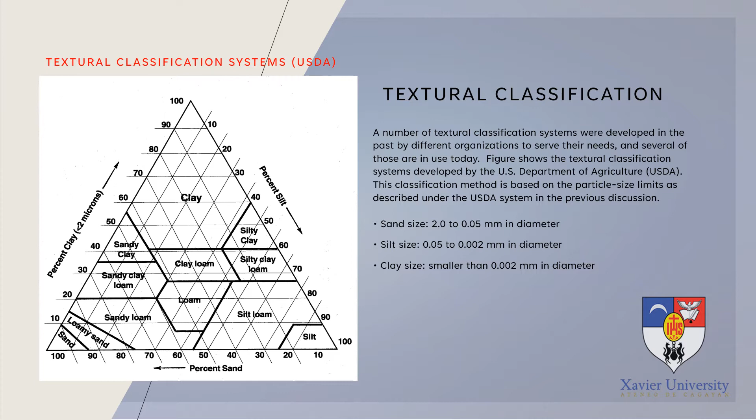So we can see here the percentage for clay, the percentage of silt, and the percentage of sand. All you have to do is pick from this. For example, we will have this problem. According to the given, we have sample A, which consists of 30% sand, 40% silt, and 30% clay size particles. So in the USDA texture classification, first we have to project the percent sand in this figure.

So we have here the percent sand, which is 30. So we have here the 30. And then we project this diagonal line from the 30 percent sand. We just follow it like that. Next, we project the percent silt, which is equal to 40. So it's here; we circle it. And the same thing we did for the sand, we project that line corresponding to this percentage.

The same is true with the percent clay. Percent clay according to the given is 30%. So if we project the line that corresponds to the 30% clay, that is what we will have. Then we identify the intersection of all three lines. And there are subdivisions here. If your point of intersection falls here, it is sandy clay; here, sandy clay loam; here, sandy loam; here, sand, silt, silty loam.

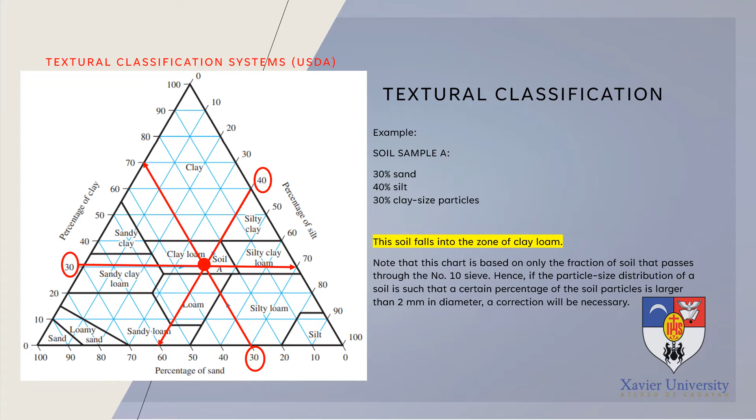We have here another example, soil B, with 20% gravel, 10% sand, 30% silt, and 40% clay. First we have to make a correction or modification. How do we do that? First, for the sand size, we have the percent composition times 100 over 100 minus the percent gravel. As you can see, for the three particle sizes, sand, silt, and clay, this is constant: 100 minus 20 is the denominator for each.

So the formula here is actually 100 minus the percent fraction for gravel, and then the same here, 30% times 100 for the silt, and the 40% for clay, which is given, times 100. So all you have to do is compute for that and then proceed with the same procedure that we did in soil sample A. So we just have to project, since it's 12.5, it's not exact, so maybe it is somewhere here. So we'll project a line there.

And then for the silt size, it is 37.5. It's not exact because it's somewhere between 30 and 40, so we just project somewhere there. And then as for the clay size, it is 50 luckily, so it's exact. So at least it's right here on its calibration. So for 50 clay percentage, we have to project that. And then the point of intersection belongs to the division of clay. We can see it easily. So, meaning, we can classify our soil as a clay.

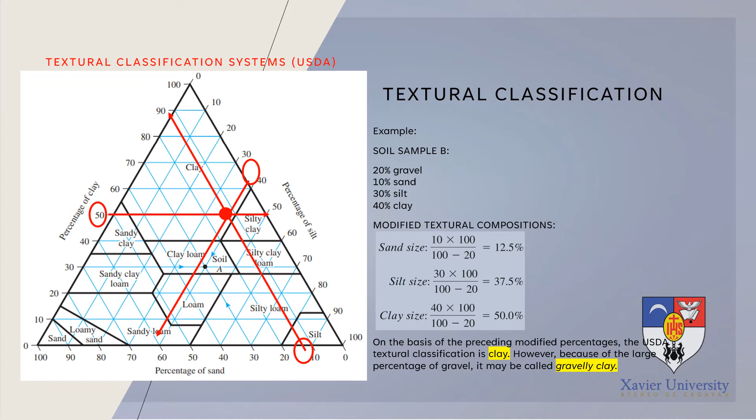We have presented here the system followed by the USDA, the US Department of Agriculture. So, we can notice it has not taken into account the plasticity properties of our soil, but we will be tackling that in our next discussions of other systems.

So, classification by engineering behavior. Although the textural classification of soil is relatively simple, it is based entirely on the particle size distribution. So, it doesn't really use other factors, only the particle size distribution of our soil. The amount and type of clay minerals present in fine-grained soils dictate to a great extent their physical properties. Hence, the soil engineer must also consider plasticity, which results from the presence of clay minerals, to interpret soil characteristics properly.

So because textural classification systems do not take plasticity into account and are not totally indicative of many important soil properties, they are inadequate for most engineering purposes. So currently, two more elaborate classification systems are commonly used by soils engineers. Both systems take into consideration the particle size distribution and the Atterberg limits. They are the American Association of State Highway and Transportation Officials, or AASHTO, and the Unified Soil Classification System. The AASHTO system is used mostly by state and county highway departments, while geotechnical engineers generally prefer the Unified classification system. These two systems will be discussed in our succeeding slides.

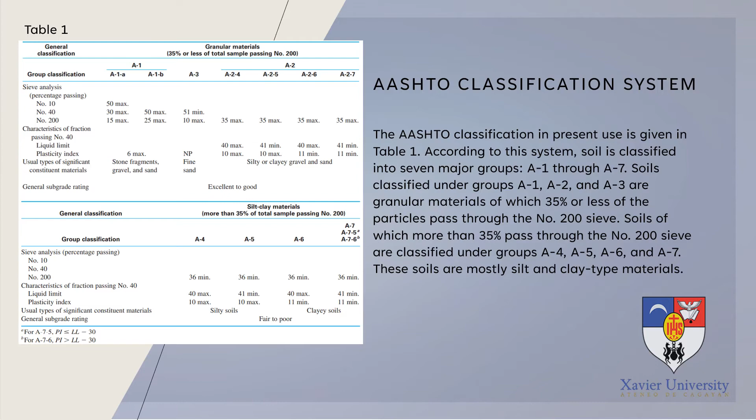So this classification system is based on the following criteria. It takes into account the grain size: gravel, the fraction passing the 75 mm sieve and retained on number 10. It also takes into account the sand, which is the fraction passing the number 10 and retained on number 200. And of course, the silt and clay fraction, which is the one passing the number 200 US sieve. It also takes into account the plasticity.

The plasticity properties of our soil are included in the classification. The term silty is applied when the fine fractions of the soil have a plasticity index of 10 or less. The term clayey is applied when the fine fractions have a plasticity index of 11 or more. If cobbles and boulders, those with sizes larger than 75 mm, are encountered, they are excluded from the portion of the soil sample from which classification is made. However, the percentage of such material is recorded.

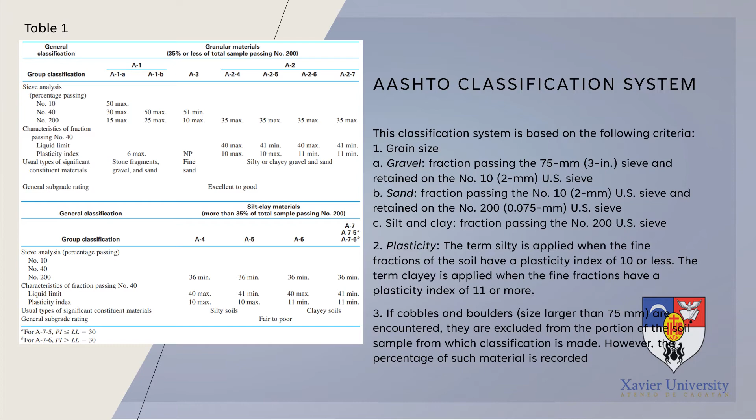Okay, to classify a soil according to this table, one must apply the test data from left to right. Kato kaganihan, no? Magbase ka to from the leftmost column, padulong sa right, katong table 1 nag-represent kaganiha. By process of elimination, the first group from the left into which the test data fit is the correct classification.

So figure 1 here is another chart that our AASHTO classification system uses. It shows a plot of the range of the liquid limit and the plasticity index for the soils that fall into groups A2, A4, A5, A6, and A7. To evaluate the quality of a soil as a highway subgrade material, one must also incorporate a number called the group index. Aside from naming it A7 or A1 and so on, we also have to indicate the group index. This index is written in parentheses after the group or subgroup designation.

The group index is given in equation 1. F sub 200 is the percentage passing through number 200. So F200 minus 35 times 0.2 plus 0.005 times LL, the liquid limit, minus 40, plus 0.01 times F200, still the percent passing sieve number 200, minus 15, times PI, which is the plasticity index, minus 10. We know the plasticity index is equal to LL minus PL. So that's how we compute our group index.

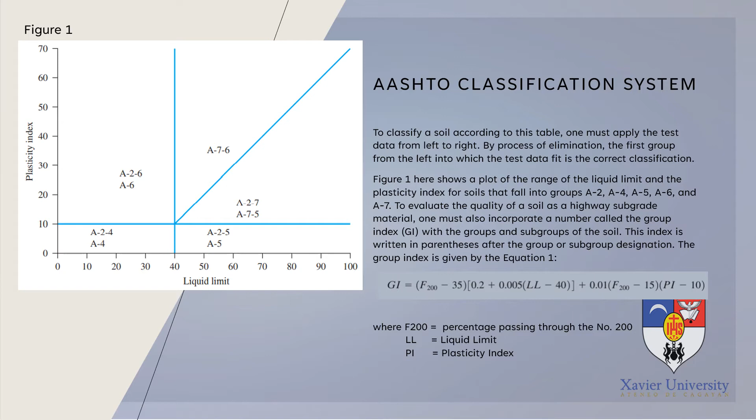Okay, so the first term of equation 1, the one with F200 minus 35, is the partial group index determined from the liquid limit, because it contains our liquid limit value. And then the second term, 0.01 times F200 minus 15, contains the value of our PI. That means it is the partial group index determined from the plasticity index.

Following are some rules for determining the group index. If equation 1 yields a negative value for the group index, it is taken as 0. The group index calculated from equation 1 is rounded off to the nearest whole number. For example, if we come up with 3.4 for our group index, that will be rounded off to 3. If it is 3.5, it will be rounded off to 4. Another rule is there is no upper limit for the group index. The group index of soils belonging to A1-a, A1-b, A2-4, A2-5, and A3 is always 0.

When calculating the group index for soils that belong to groups A2-6 and A2-7, use the partial group index for PI, or equation 2. That's the one to use if our soil belongs to A2-6 and A2-7, so we use that equation to solve for our group index.

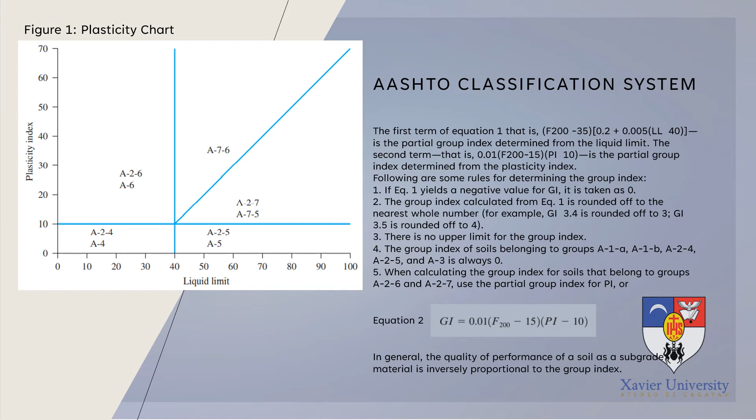So we have here a sample problem of soil containing its data, and then we will classify it according to the AASHTO soil classification. So the results of the particle size analysis, the sieve analysis, of a soil are as follows. Percent passing number 10 is 100, percent passing number 40 is 80, percent passing number 200 sieve is 58.

The liquid limit and the plasticity index of the number 40 fraction of the soil are 30 and 10. So the LL is 30 and the PI is 10, respectively. Classify the soil by the AASHTO system. So, solution: using Table 1, since 58% of the soil is passing through number 200 sieve, it falls under the classifications. So let's use this first.

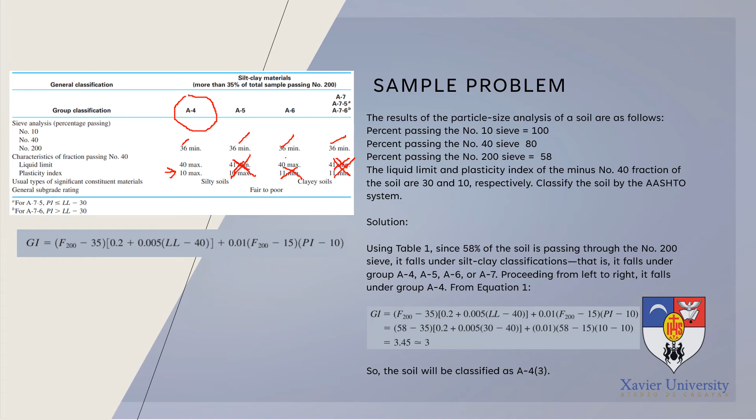So now let us go to the third part of our classification systems, which is the unified soil classification system. The original form of this system was proposed by Casagrande in 1942 for use in the airfield construction works undertaken by the Army Corps of Engineers during World War II in cooperation with the U.S. Bureau of Reclamation. This system was revised in 1952, and at present it is used widely by engineers, and its ASTM designation is D2487.

Okay, so the unified classification system is presented here in table 2. It is the same as our AASHTO soil classification system, which relies on tabular information. The system classifies soil into two broad categories. We have the coarse grained soils that are gravelly and sandy in nature with less than 50% passing through the number 200 sieve. The group symbols start with the prefix G or S. G stands for gravel or gravelly soil, and S stands for sand or sandy soil.

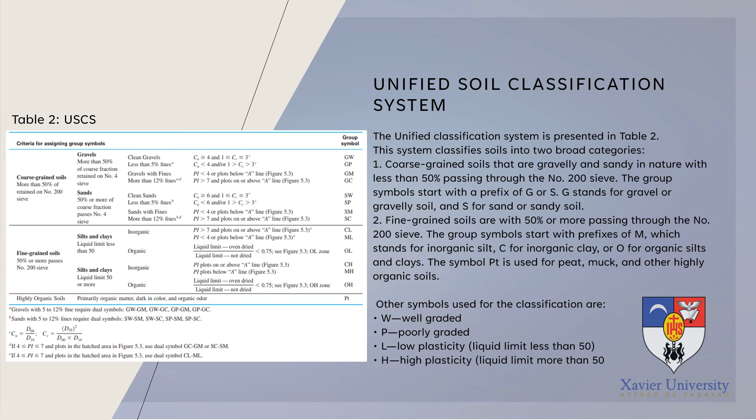So, the same as our AASHTO, there is also a plasticity chart, the same as earlier. For proper classification according to the system, some or all of the following information must be known. We have to know the percent of gravel, the percent of sand, and then the percent of silt and clay, and the uniformity coefficient Cu, and the coefficient of gradation Cc. Liquid limit and plasticity index, of course, have to be known.

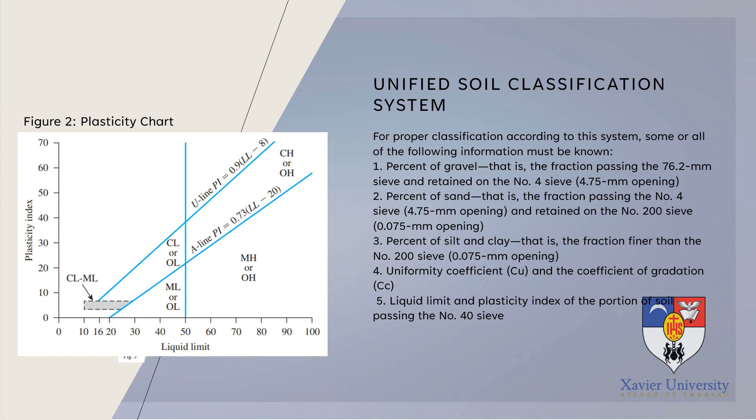So, the group symbols for coarse grained gravelly soils are GW, no? Start sila sa G. Similarly, the group symbols for fine grained soils, kay mao ni sila, no?

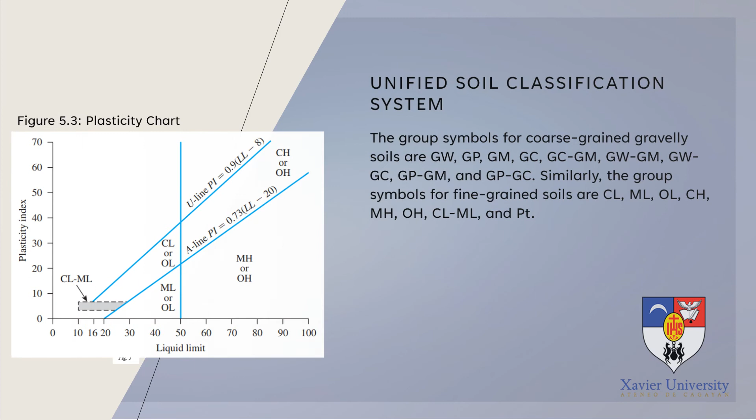So we have here a sample problem. For a given soil, the following are known. Percent passing number 4 sieve is 70. For number 200 sieve is 30. Liquid limit is 33, and plastic limit is 12. So classify the soil using the unified soil classification system and give the group symbol and the group name.

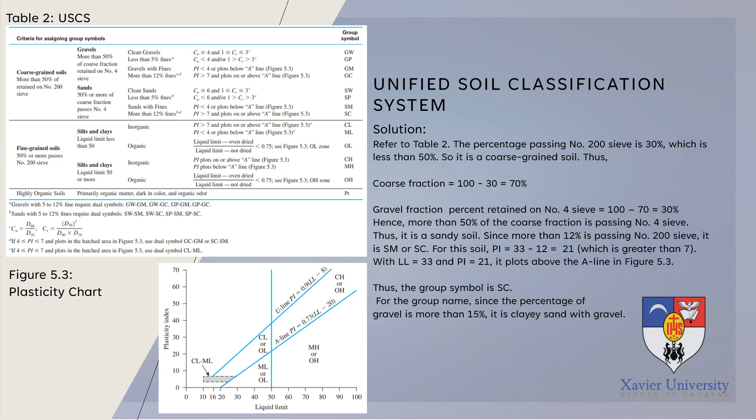Okay? And now for the group name, since the percentage of the gravel is more than 15%, it is clayey sand with gravel. So mag-refer ta diri. SC, clayey sands, but since our soil actually contains gravel, that's why it's called clayey sand with gravel. So that is how we classify soil in accordance with the USCS or the Unified Soil Classification System.

All right, so that would be all for the discussion of our soil classification. I hope you were able to grasp the idea of how each of the three classification systems classify our soil with respect to their physical properties or index properties, as well as the AASHTO and the USCS. Although these classification systems are widely used around the world, ginagamit or gina-adapt ni silang tulo, so it's very important for us to know how to use these classification systems.